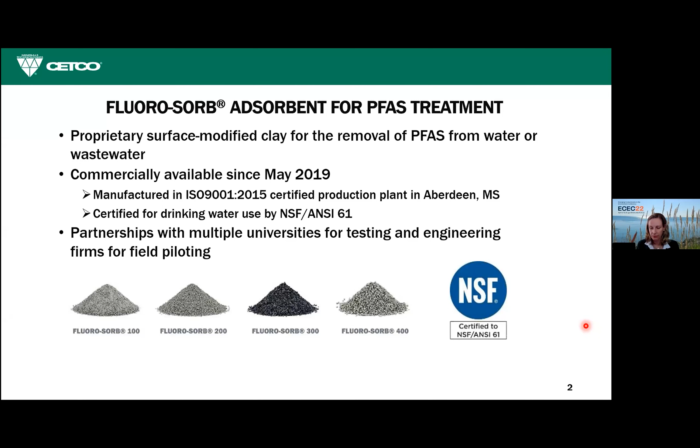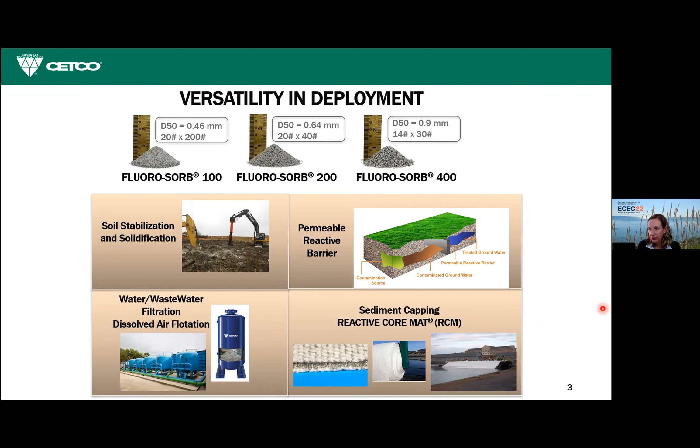Whoops, what happened to me? Hold on, my arrows are not working. Let's go back. Let's advance it here.

Okay, so what is surface modified clay? Surface modified clay adsorbents are obtained by converting sodium bentonite to an adsorption media using a modification agent that has a high affinity for a variety of PFAS. And basically that's what this picture here shows. So clay is these platelets or sheets of alumina and silica hydroxide with cations and water in between, and that gives the property that most people know about bentonite clay, which is that it swells when you put it in water, because water comes into these intergallery spaces and the clay swells. When we react the modification agent shown here with the clay, it replaces the cations and water in the intergallery space and makes the clay basically hydrophobic so that it does not swell when contacted with water.

And this is a phenomenon that can be tracked by something called the d-spacing, which is measured in the laboratory with an X-ray diffraction scan. It's a pretty basic measurement. The d-spacing for bentonite clay is 10 to 13 angstroms. And when you have the surface modification, the d-spacing increases to 15 to 35 angstroms.

The modification agent is specific for PFAS in that it has a positively charged head group that will attract the negatively charged head groups of negatively charged PFAS, which most that are of regulatory concern are. And then it has a hydrophobic hydrocarbon chain that is a driving force for absorption for the perfluorinated chain of PFAS compounds. So it has a dual driving force in terms of absorption of PFAS, and it's more energetically favorable for the PFAS to partition into the adsorbent and associate with the surface modification than it is to stay in the water.

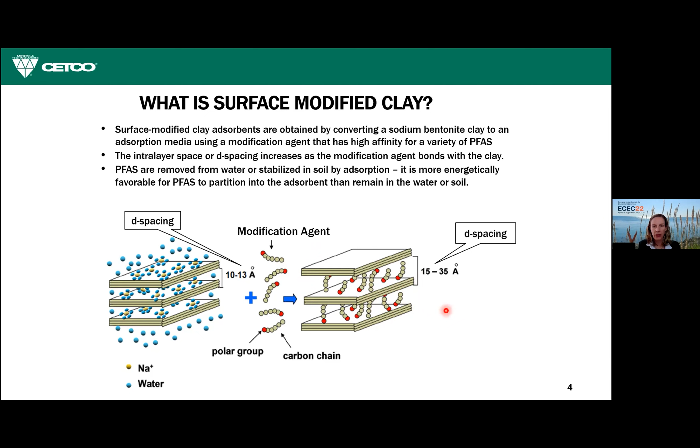And this leads to a unique absorption mechanism, which is shown here. This is another cartoon showing the same thing, the d-spacing increase of the clay as the PFAS sorbs in the intergallery spaces.

So basically, this is a plot of absorption capacity versus equilibrium concentration. And as the starting concentration increases, you get the step change in absorption capacity. So you're getting more PFAS in per gram of Fluorosorb. And that's because, and this has been verified with modeling and also looking at the d-spacing in the laboratory, was published in Water Research in the last couple of years.

So the d-spacing also increases as various PFAS molecules sorb to the surface modification in the clay. And here's the actual data just showing that step change. So we see this with every single PFAS compound that's been tested, 18 or so different compounds have been tested in the laboratory.

So I guess the conclusion is that this is not a surface area driven mechanism like you would get with granular activated carbon or GAC. It's a unique property in that the reactive area of the surface modified clay actually increases as you increase the PFAS concentration.

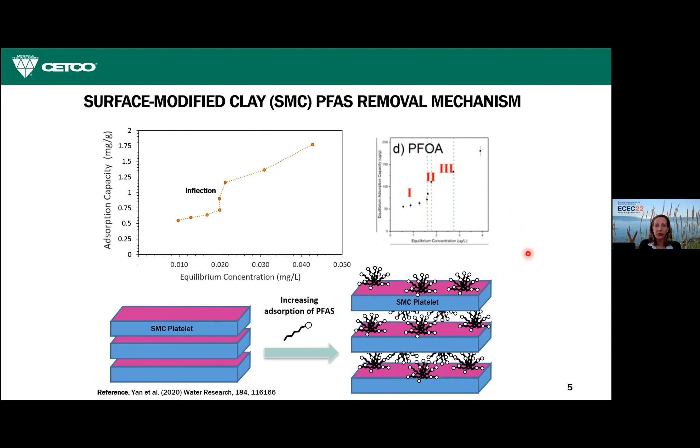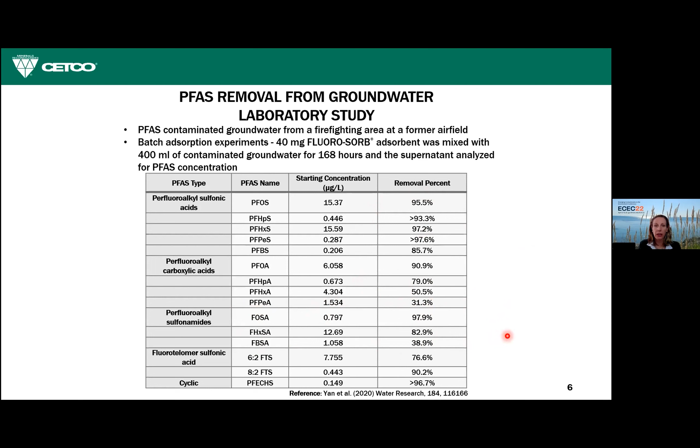This is some basic lab studies done at McGill University. These are batch studies with contaminated groundwater from an AFFF training area mixed with Fluorosorb and incubated. This is at equilibrium, and it's showing that Fluorosorb will absorb the long chain PFAS very well. It still does absorb short chain PFAS like PFPeA, but the percentage is reduced, and same with FBSA, another 4 carbon shorter chain PFAS. And that was also shown in the same study.

They made a plot of the KD or linear distribution coefficient, which is a measure of absorption capacity, and the molecular weight for the different classes of PFAS, so carboxylates, sulfonamides, sulfonates, and fluorotelomer sulfonates. And first of all, sulfonates are the best absorbed, fluorotelomer sulfonates the worst, if you can put it that way.

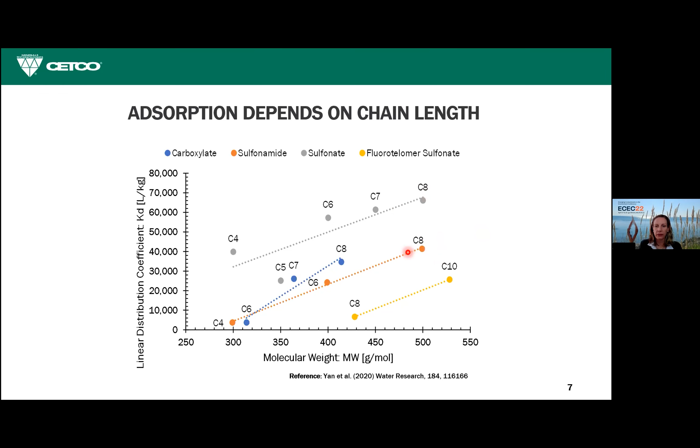But as the chain length increases from C4 to C8, so this is PFOS up here, the highest absorption capacity on Fluorosorb, the absorption capacity increases significantly. But you can see that PFOS and PFOA have higher absorption capacities when looking at the suite of PFAS compounds.

So getting right into some testing, Orange County Water District has a PFAS testing program for the PFAS in their groundwater. And I'm going to talk about, as quickly as I can, the pilot study. And they also did something called rapid small scale column test, which is where you grind media, put it in a tiny column, and then you're able to get breakthrough quicker because the media takes a long time to break through. For example, this pilot study took 18 months to get data. So they have low concentrations in their groundwater.

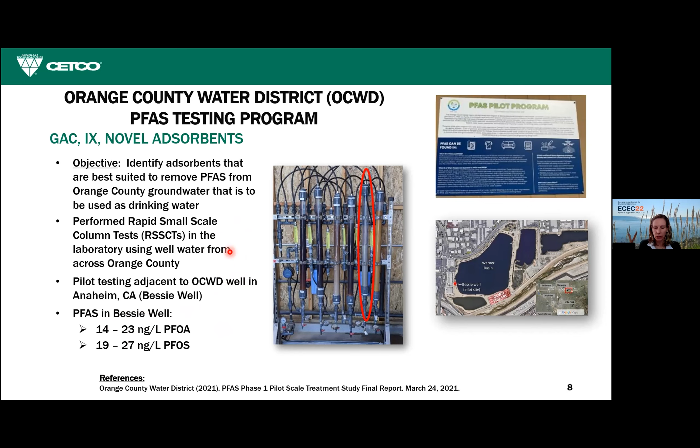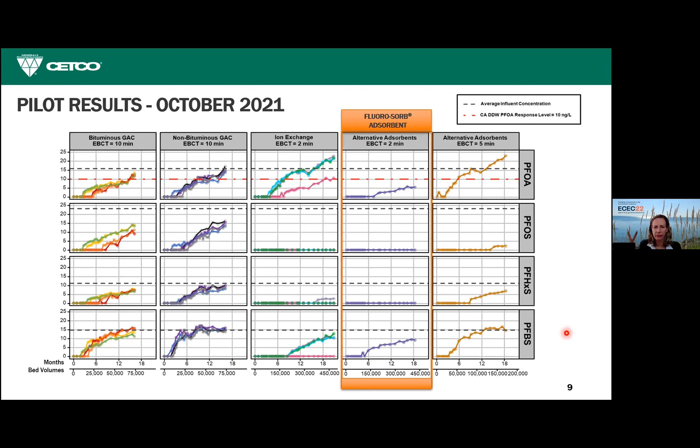So Fluorosorb did break through. It didn't break through as fast as some of the other GACs, but it did break through. But it is less than their response level, which I think is 10 nanograms per liter. They also did RSSCTs.

How am I doing on time? I can't see my clock right now. Just want to make sure. Okay, you still got 5 minutes left. 5 minutes. Okay, good.

Real quick on the RSSCT results, this is what an RSSCT column looks like. The bed volume varies, but let's say it's about 2 milliliters. And you're able to run many different test conditions. So you can compare different waters and that sort of thing, and much quicker than doing a pilot study, which would take months.

And so Orange County Water District compared a high DOC, or dissolved organic carbon, water, the levels are shown here, to a low organic carbon water, because even small increases in dissolved organic carbon can cause problems for GAC adsorption of PFAS. And what they found was that Fluorosorb was not affected by the DOC concentration, and Fluorosorb was able to outperform the GAC in the high and the low DOC condition, but in the high DOC condition it was a significant improvement.

And this is specifically because with GAC, other dissolved organic carbon compounds compete with PFAS for sorption, and that is not the case with Fluorosorb, which is specific. The surface modification is specific for PFAS. And so if you're okay with not adsorbing dissolved organic carbon, then Fluorosorb is a great adsorbent for PFAS because the DOC just goes right through. And that's what this plot here shows.

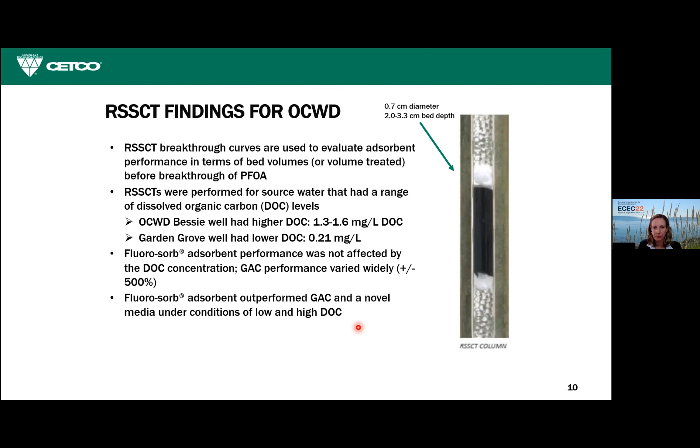The C over C naught is a measure of the breakthrough, and the volume filtered is the volume that was treated before you hit your treatment target, which is 60% of the influent. This is for PFOA. And you can see that Fluorosorb took the longest to break through under the high DOC condition compared to GAC shown here, and so therefore more water was treated before you would have to change out your media in a vessel, for example.

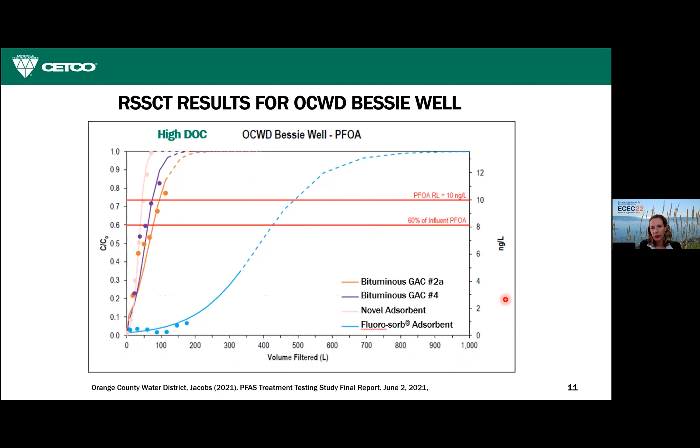All right, moving on. I have one last set of results to show. This is treating landfill leachate, lab studies with RSSCTs showing Fluorosorb adsorption of PFAS from landfill leachate. This is the setup here. The RSSCTs are scaled up using a constant diffusivity scaling to get an idea of what it would be like in a pilot study.

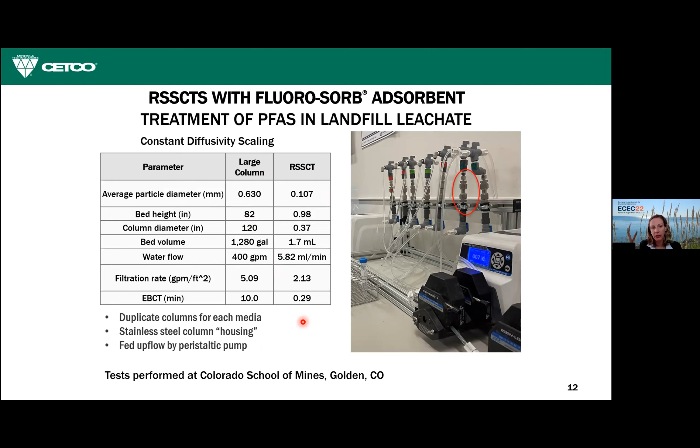This landfill leachate had a TOC of 560 milligrams per liter, so it's a significantly higher concentration than most groundwaters. It's a high strength leachate. The conductivity shown here is really high. There's a lot of anions and cations.

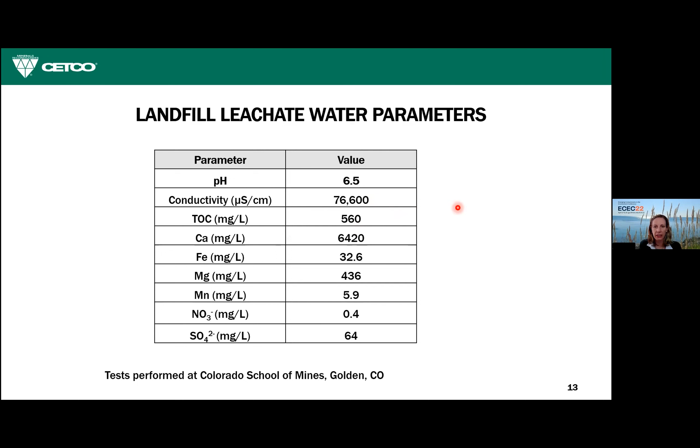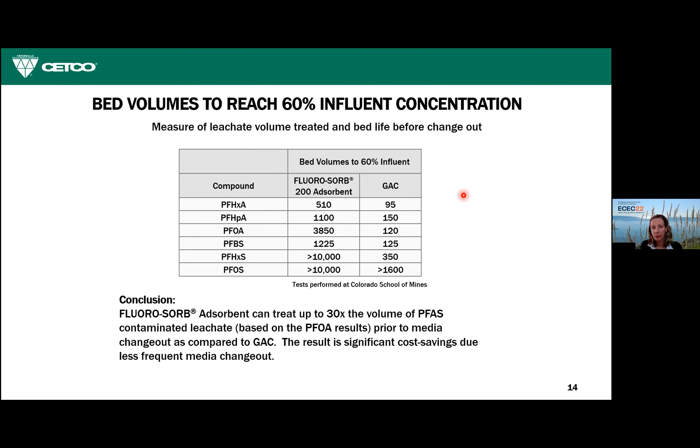2 minutes remaining. So the conclusion is that Fluorosorb was able to treat many more bed volumes for all different PFAS compounds compared to GAC, and that was judged by treatment to 60% of the influent concentration. And we have several full-scale landfill leachate systems that are going in specifically because Fluorosorb is not affected by the background or the other water quality constituents.

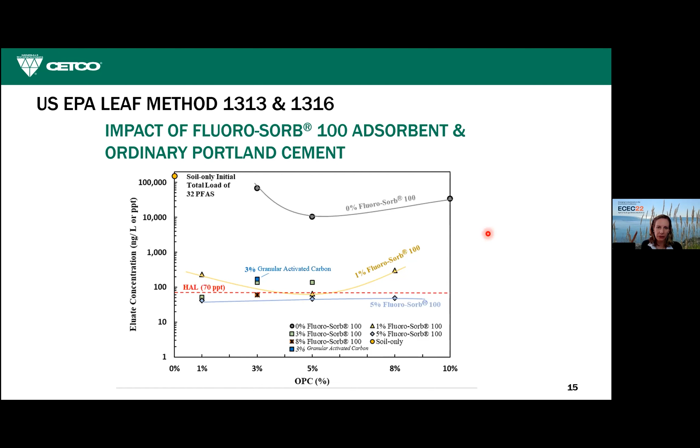I just want to make one comment about soil stabilization. Fluorosorb can be used to stabilize PFAS in soil. This plot is showing the reduction in PFAS leaching from soil for a 5% mix of Fluorosorb 100 and ordinary Portland cement. And you can see that it was able to reduce the leaching beneath the EPA health advisory limit as compared to 0% Fluorosorb. And we also have a full-scale application for soil stabilization of PFAS with Fluorosorb.

So conclusions on surface modified clay, the key things to remember: it has a high adsorption capacity for a variety of PFAS and is specific for PFAS. The adsorption kinetics are fast. You can use a 2-minute empty bed contact time if you're looking at drinking water filtration. It's resistant to competitive adsorption by co-contaminants, and it's very versatile in its deployment.